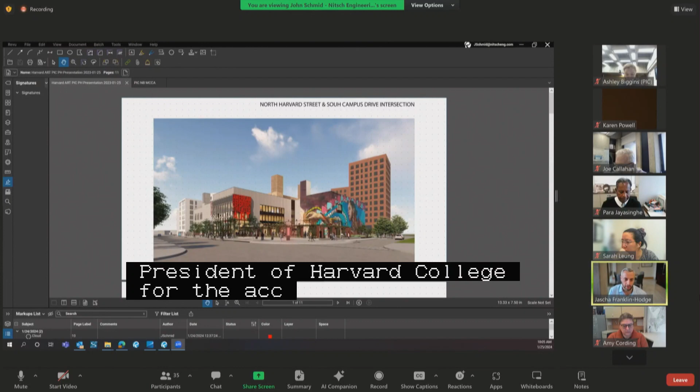Now on to our first public hearing. Public hearing number 1 on a petition by the President and Fellows of Harvard College for the acceptance of a pedestrian easement adjacent to North Harvard Street, Public Way, Brighton, located on its northwesterly side at address number 175, between Ivy Lane and South Campus Drive. This was new business on January 11th, as shown on a plan entitled City of Boston Public Works Department Engineering Division Pedestrian Easement Plan, 175 North Harvard Street, Allston, one sheet dated December 2023. Would the petitioners please introduce themselves, their affiliations, give us a brief reintroduction to this project, and talk through any changes to this action since your new business hearing.

I'll start off. Good morning. My name is Susan Malaab. I'm with Harvard University. I work for Harvard Capital Projects, and I'm managing the American Repertory Theater project, the new home for the American Repertory Theater at 175 North Harvard Street. I'll hand it off to John Schmid. Commissioners, John Schmid with Nitsch Engineering. Here's just a rendering of the proposed building. I'll skip to slide 7.

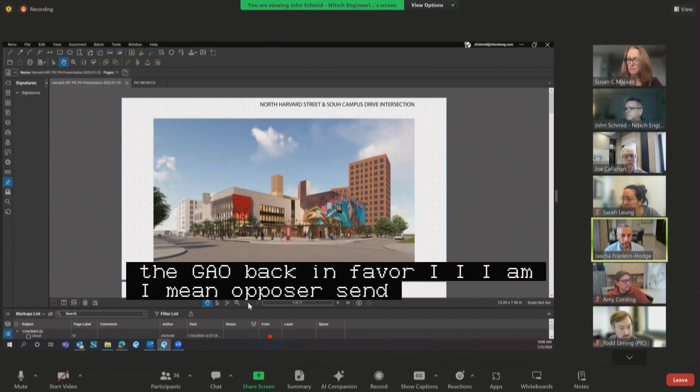On to public hearing number 2 on a petition by the President and Fellows of Harvard College for the making of specific repairs within North Harvard Street, Public Way, Brighton, located on its northwesterly side at address number 175, generally between Ivy Lane and South Campus Drive, consisting of curb realignment, sidewalk reconstruction with structural soil, as well as new and relocated pedestrian ramps, specialty pavement, street lighting infrastructure, street trees, pedestrian fencing, bike racks, street furniture, raised crosswalks, protected bicycle facilities, and a floating bus stop.

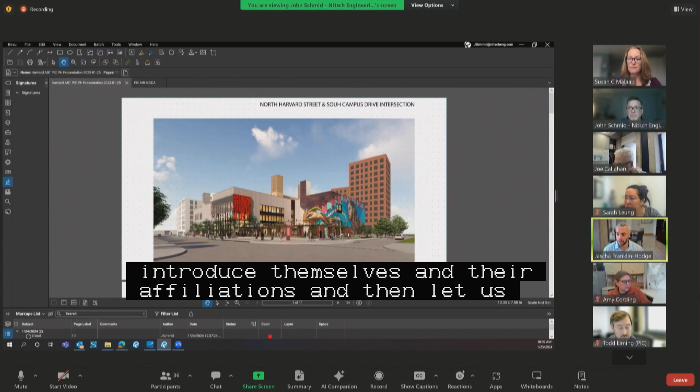This was new business on January 11th, as shown on a set of plans entitled City of Boston Public Works Department Engineering Division, Specific Repairs Plan, 175 North Harvard Street, Harvard University, American Repertory Theater, Public Way, Allston, 3 sheets dated December 2023. Would the petitioners please reintroduce themselves and their affiliations, and let us know what has changed, if anything, since your last hearing, and whether there are any updates on any of the issues that were discussed at that hearing.

Again, good morning. My name is Susan Malaab, and I'm with Harvard University, managing the project for the ART. I'll hand it off to John Schmid. Good morning, John Schmid with Nitsch Engineering. The drawings have not changed since new business, but I'll quickly go over what we're proposing here.

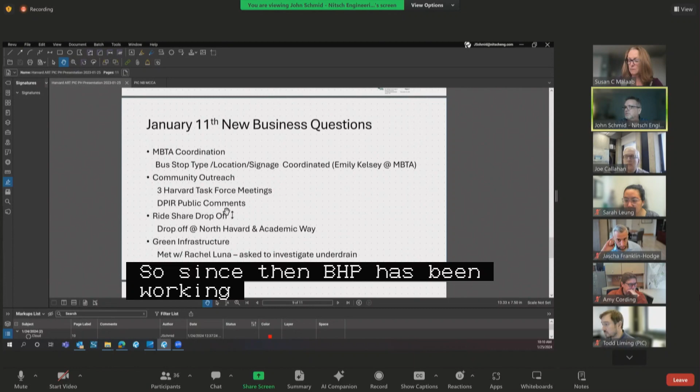Since then, VHB has been working with the MBTA. We have confirmation that the bus stop type as shown on these drawings, its location, and the signage have been coordinated between Harvard and the MBTA.

There's a question raised about community outreach regarding this project. There were 3 Harvard Task Force meetings held, as well as the BPDA process, and we have DPIR public comments that were addressed during that process.

That has been reviewed and coordinated at the Harvard Task Force, at the last Harvard Task Force meeting as well. And then there was also a question raised about green infrastructure.

My office met with Rachel Luna in the past week or so and reviewed the opportunities to provide some additional green infrastructure. She made some suggestions, and we reviewed our drawings and documentation and discussed this with Rachel, but what's being asked isn't feasible based on the existing conditions. I believe Rachel is satisfied with the project.

That's everything I have. If you have any questions. Commissioners, question?

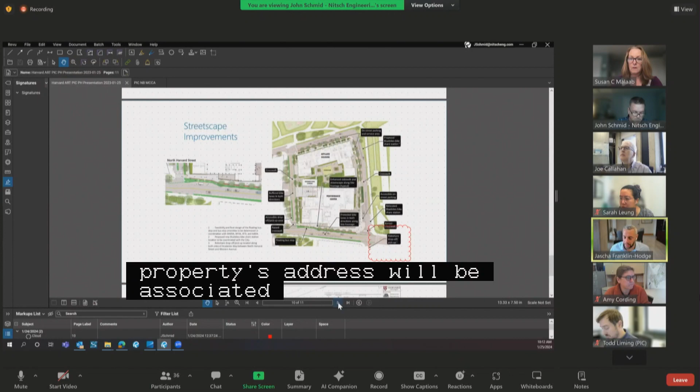I have two. One, with regards to the rideshare drop-off, has there been any conversations with rideshare companies about how the property's address will be associated with that designated drop-off area? We find that unless that is baked into their apps, oftentimes drivers don't recognize there is an area intended for drop-off and pickup, and therefore do it in the wrong place.

I'll answer that question. We are going to pursue those conversations as we go through our construction activity and prepare for the building opening. That's definitely been part of all our planning around having geofencing to prevent people from just pulling up out front and disrupting traffic flow on North Harvard Street.

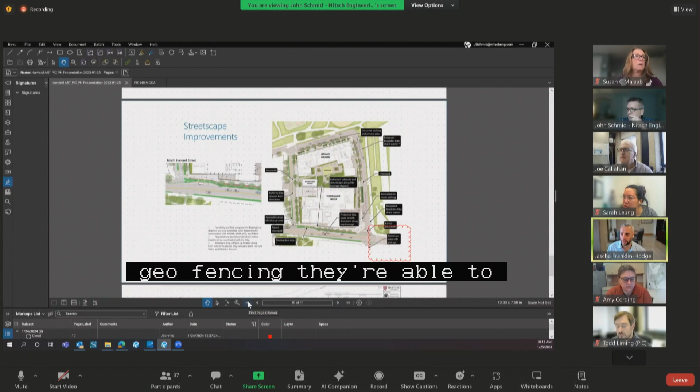Okay, thank you, appreciate that. And obviously this is somewhat dependent on their ability and willingness to cooperate with this, but I appreciate you pursuing that. My one additional ask would be that regardless of what level of geofencing they're able to offer, as the building is constructed and the site plans and signage plan are established, Harvard commits to ensuring there is ample and adequate signage throughout the building and in promotional materials — how to get to the venue — that clearly directs people coming by or leaving by rideshare to the correct locations.

That will be part of the program for the building. Correct. And in fact, we spell all of that out in our DPIR response to the city, including how we can control event management and larger crowds that might be expected depending on the shows happening and other activity in the neighborhood. Excellent, thank you, I appreciate that.

And then my other question — apologies if this was addressed at the last meeting and I'm just misremembering — but the question of winter maintenance of the bus island, who would be coordinating snow removal? Is there a clear resolution on that?

We have included those responsibilities as part of the LMA, that Harvard will manage that for the bike lane and the bus stop shelter. Excellent, perfect. Those are all my questions. Appreciate your support in resolving those issues.

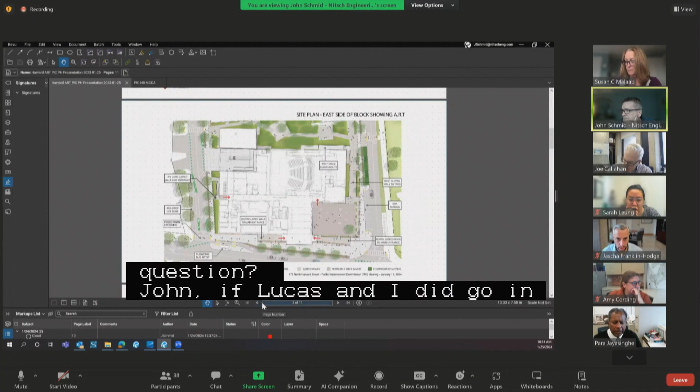Okay, so those street name signs will clearly mark them as private ways, and any type of curbside regulatory control will be a private issue, right? They are private streets, but a public way.

And that means private streets open to public travel? Correct, that's how private ways are structured. My question is, the parking regulations along those private ways, are they going to be managed by the city's transportation department or by Harvard? By Harvard.

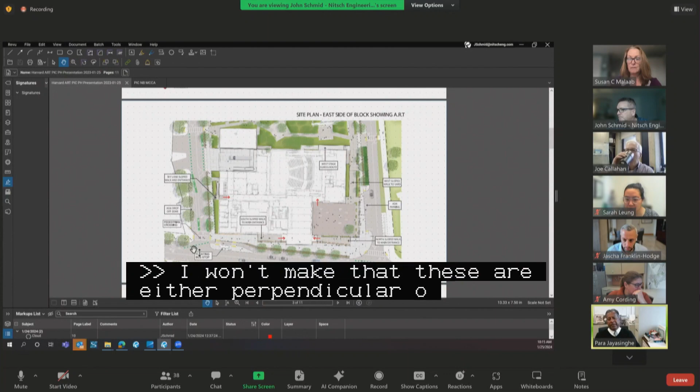Yeah, they currently are, and that will remain. And all those parking spots are parallel parking spots, right? I can't quite make out the spot, are they perpendicular or parallel? These here are perpendicular. Okay, oh, definitely private way then. Right. Sorry. Okay, thank you.

All right, PIC staff or members of the public? All set on this, I think.

Seeing no other raised hands or unmuted mics, do I hear a motion to approve public hearing number 2? I make a motion to approve a petition by the President and Fellows of Harvard College for the making of specific repairs in North Harvard Street, as read into the record by the chair. Second. All in favor? Aye. Any opposed or abstain? So moved.

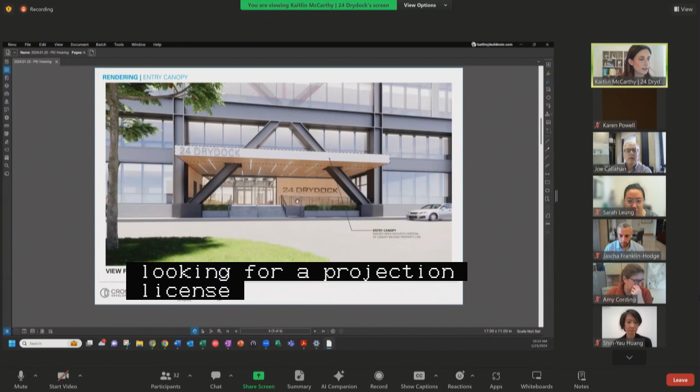24 Drydock is located within the Ray L. Flynn Marine Industrial Park, about 237,000 square feet of life science. We are looking for a projection license for a canopy that will go over Drydock Ave. Here's an overview of where the project is and a rendering of what the canopy will look like. As discussed last time, the canopy was designed within the measurements that PIC would typically require, so there will be a 15-foot minimum vertical clearance, and it will project about 4.5 feet over the sidewalk. I'll stop there—please let me know if you need more information. But as mentioned, we went through this in detail a few weeks ago, so hopefully it's still fresh in everyone's mind.

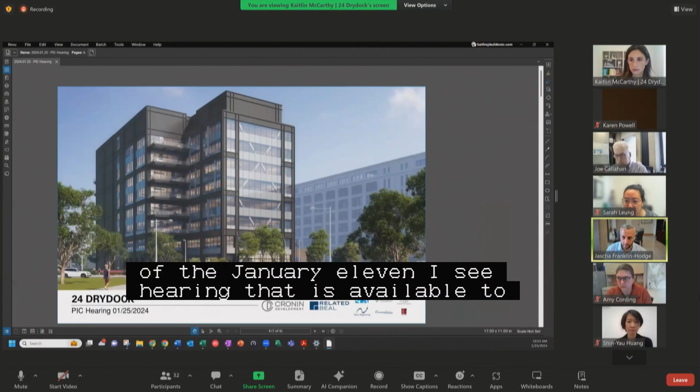I appreciate that. For the record, if anybody is looking for that more detailed presentation, you'll find it in the recording of the January 11th PIC hearing, available for anyone who wants that reference. I know there are a couple of outstanding questions related to this from the last new business. Perhaps if there's an update on any of those you want to share now, that would be fine, or we can defer that to the public hearing you'll presumably have again in 2 weeks. So I'll give the proponents a chance to share any updates now, otherwise we can just do it all in a couple of weeks.

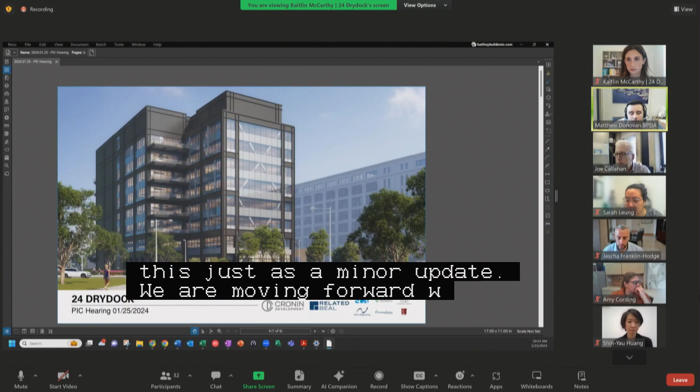Thank you, Mr. Chair. Matt Donovan from the Boston Planning and Development Agency. We are co-petitioners on this. Just as a minor update, we are moving forward with drafting language that will create an administrative fix for the accompanying and future improvements that we anticipate will need PIC review. We anticipate I'll have language for Todd well before the public hearing that'll codify what that process will look like, but it will include PIC review prior to the issuance of a full building permit for streetscape improvements yet to be transferred. Excellent, thank you. I'm glad to hear we're making some progress on that. Commissioners, any questions for the proponents?

PIC staff or members of the public?

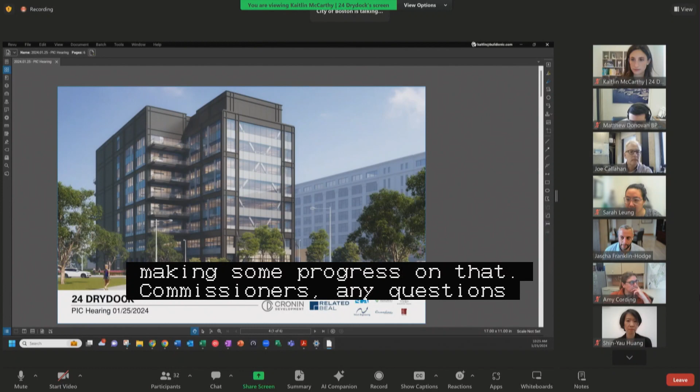Just for the record, I'll remind everybody that this street, Drydock Ave, is currently under EDIC's jurisdiction, but EDIC and the city have been in talks to transfer authority to the city. So because of that, this project is coming through the PIC process at this time.

Seeing and hearing no other comments, will you be ready for your public hearing officially in 2 weeks? Yes. All right, we will see you on February 8th, correct, Todd? Yes, correct.

On to new business number 2, 415 Summer Street, South Boston, pedestrian easement, specific repairs on a set of petitions by the Massachusetts Convention Center Authority. Would the proponents please introduce themselves, their affiliations, give us an overview of the project, and walk us through the specific actions that are being proposed today.

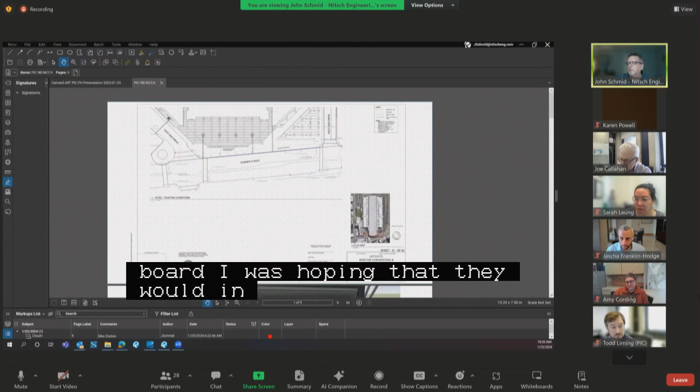Good morning, John Schmid with Nitsch Engineering. I believe folks from the MCCA are on board, I was hoping that they would jump in. I'm working with the MCCA, and Homeland Security has requested and is requiring that they install new bollards to meet new requirements. This process started several years ago, and now we're at the point where we can bring it before the commission. This is the existing condition plan of the area where there are some existing bollards now.

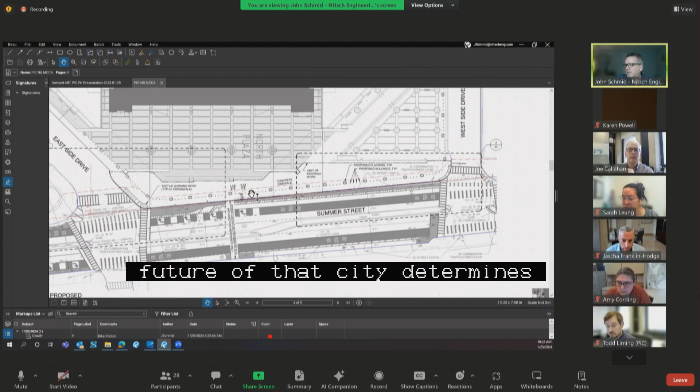Here's a plan view of it. We've been working closely with BTD over the last 9 months or so, and understand they've recently implemented their pilot program for the bike lane here. Presently the bikes come down and run along the gutter of the sidewalk. But should this change in the future and the city determines the bike should come onto the sidewalk here, this area at 8.8 feet wide is designed and appropriate for the bike lane, and this has also been talked through with multiple agencies at the city. The bike lane would then move up here, and the pedestrian path of travel would go behind the bollards here.

Because this may ultimately force the pedestrian to go behind the bollards, we are also increasing the easement that's there. Here's the proposed easement plan. This is different than the one submitted for new business because it's in the process of being developed. Essentially, the easement would run along the edge of the existing easement, providing 16 feet of clearance from the proposed bollards and planters to the edge of the easement line. There was one little pinch point here around the step, where the clearance is still 11.7 feet.

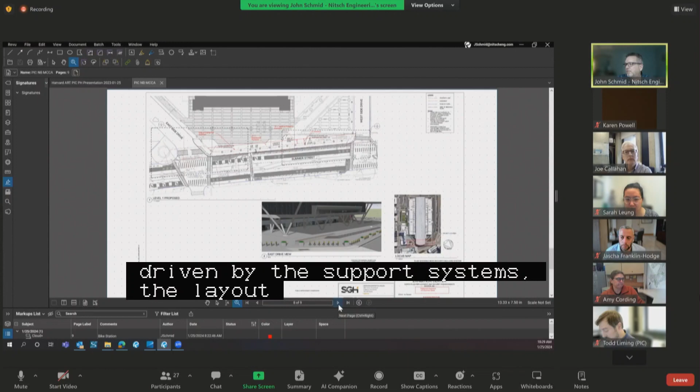Here's some details. The design itself is fairly complicated because it is on a bridge deck, so the placement and location of the bollards and planters are really being driven by the support system and steel layout of the bridge deck below. This is what was submitted to you and has been superseded regarding the pedestrian easement plan.

And then I understand there's been some question about the Blue Bike Station. Through conversations we had with BTD last summer, the convention center is committed to moving the Blue Bike Station here, which is essentially here on this drawing. There's adequate space here for the Blue Bike Station without impeding the pedestrian experience on the sidewalk. We feel this is a nice, safe location for it, because right now it's just wasted concrete space that could serve well for a bike station.

Does the commission have any questions? Commissioners?

Amy, I'm going to put you on the spot a little bit and ask you to speak to the statement by Mr. Schmid that there has been sufficient space left between the bollards and the curb line to accommodate a future bike lane on the sidewalk level, as well as loading for the cab stand that exists in front of the convention center at this location.

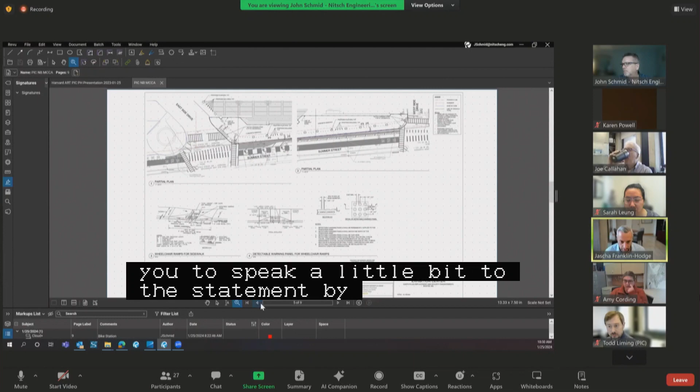Yeah, it's not enough space for a bike lane, for the signage and all of the other stuff that would be in a furnishing zone, as well as for people to get out of the cabs at the cab stand. So the bare minimum we need to maintain is 7.5 feet. But outboard of that would need to be a place for all the signs and equipment, and a place for people to safely get out of a cab without that being directly into a bike lane.

Thank you, I appreciate that. And I think, a couple of things here.

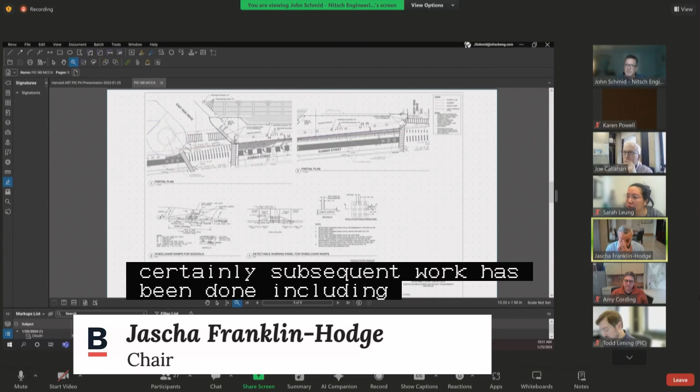The city has had a very long-standing plan to create protected bicycle infrastructure along Summer Street, going back at least as far as the Go Boston 2030 report, which is now 7 years old and specifically called this out as a priority project. Subsequent work has been done, including the current pilot configuration with a sub-minimum width bike and buffer facility, which at least tests what it would be like to have a facility there.

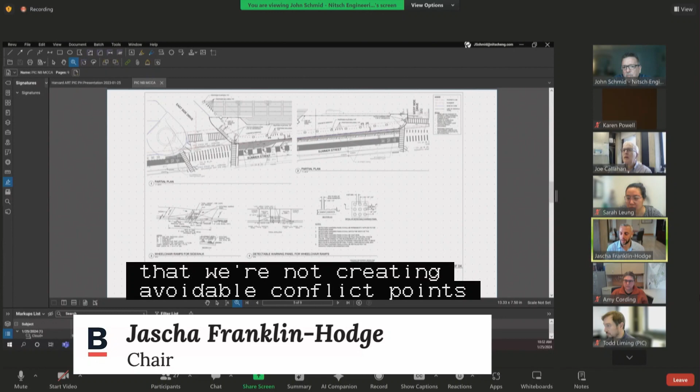The other consideration, shared by the BCEC, is that this is an area with a lot of loading activity, and it's a priority for the city to make sure that loading here is accessible, comfortable, and safe—minimizing conflicts between people getting in and out of vehicles, making it convenient for folks with mobility challenges, and not creating avoidable conflict points or narrow pinch points where bikes and someone stepping out of a cab, who may be visiting from a place without bike lanes and doesn't recognize they're entering a travel lane, could create potential conflict or safety concerns.

To amplify Amy's comment, the 8.86 feet that has been left here is concerning to us as an insufficient width to accommodate that bike facility while also ensuring comfortable, accessible loading at the curb.

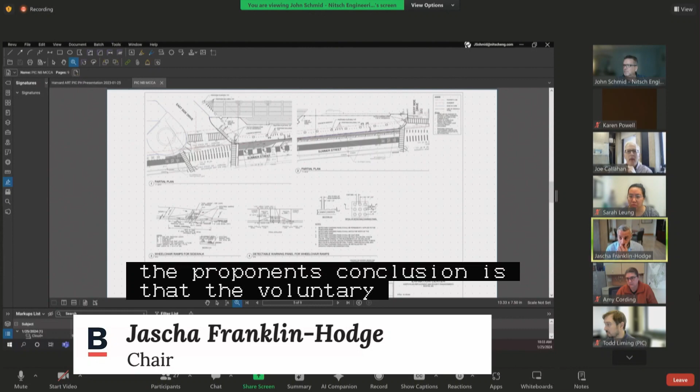My understanding is that there have been several years of back and forth conversations about this issue between BTD and the proponents, and after quite a bit of discussion and analysis, the proponents' conclusion is that the bollards cannot be relocated any further away from the curb to create a wider zone between the bollards and the curb line. John, can you confirm that's a correct statement of the proponent's position?

I'm going to defer to Matt, who was with SGH and the engineer of record on the bollard design. I'm Matt Sherman with Simpson, Gumpertz, and Heger.

The bollards have been moved back from where they originally were. What we've done is pulled them back as far as that structure allows. John, if you could flip back to page 7—the key here is that this is all elevated structure, the section down on number 5. This is all deck, all elevated deck that's supported.

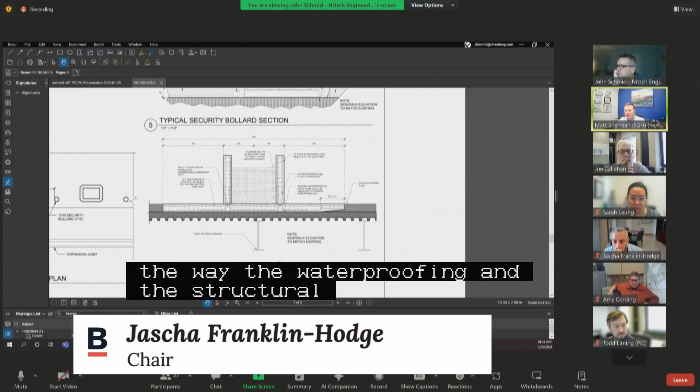The way the waterproofing and structural system works, and the way these bollards—which are crash rated and tested—have a certain dimension to their bases to meet that crash-worthiness testing and certification needed, they fit. We've pushed them back as far as we can until they start hitting the structure for the steps and other pieces of this elevated deck. It's a pretty complicated structural system up there.

We squeezed as much as we could back, and we even pulled the planters back to maximize the width there based on feedback from the initial comments on the preliminary plans. So we did pull them back—we're trying to squeeze as much room as we can out of that.

Got it. But from your perspective, structurally, with the system design needed to meet security requirements, further movement of the bollards from the curb line isn't possible given the complexities of the structure? Correct. We run into other pieces of this elevated structure behind it, and where the steps start moving up, there's a lot going on structurally. The bollard line would start getting very ragged and still have pinch points.

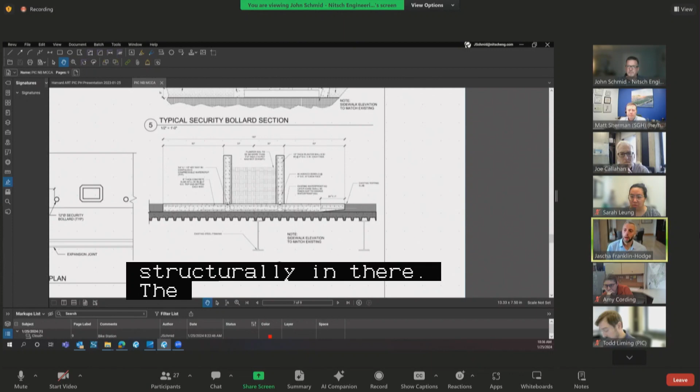Got it, that's helpful, and I appreciate the work done to maximize that space given the complexity of that underground environment.

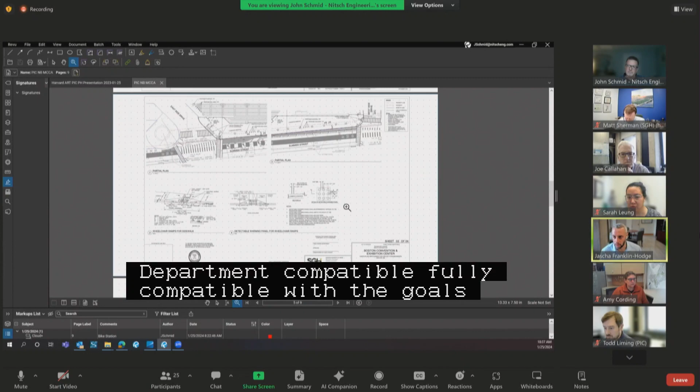And I think we're not here as a commission to challenge in any way that structural engineering or analysis. I think we appreciate that this has been well studied and well exercised. That said, given the nature of the structure and the limitations it poses on bollard placement, we find ourselves considering an action that would result in bollards being placed in a way that is not, from our perspective and the perspective of the Transportation Department, fully compatible with the goals we have for multimodal transportation along this corridor and for accessibility of the loading area.

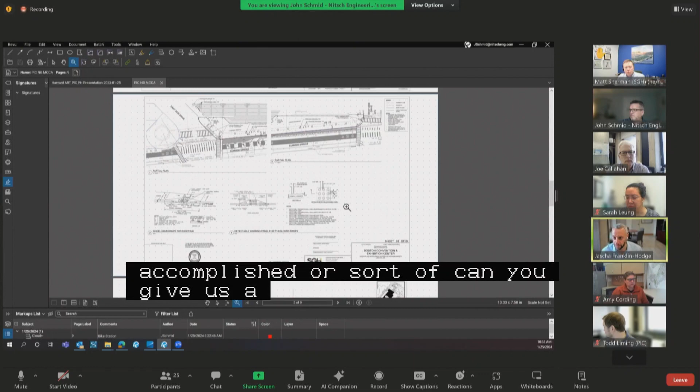I'll start with one question to help us understand the decision around bollards. I understand you're working under a Homeland Security directive around the security of the convention center, and we want to be supportive of that, but we see a mix of planters and bollards. Can you explain how the planters and bollards differ from one another? Are the planters anchored into the structure of the surface in the same way as the bollards? If not, is there a reason this project can't be accomplished with planters? Can you give us more clarity on the specific need for bollards in this vicinity?

Sure. The planters are actually recommended in the guideline documents from Homeland Security and some of the force protection documents, to help break up the appearance of the bollards, so they recommend a mix of them. You could look at similar buildings with similar levels of threat protection, like the Federal Reserve Bank or the courthouse up by North Station. Those are kind of the similar levels that are supposed to be able to stop a truck moving 30 or 40 miles an hour, depending on the zone.

The planters are all anchored in this same relatively thin slab, and that's really the big challenge here, the slab itself is very thin. So there are metal embedded pieces for the bollards that hold it down. The mix of them is they're both intended to be rated, one is rated through design, and the bollards themselves are actually crash tested, so you can't adjust them, they're an off-the-shelf item. The other piece is we weren't part of the threat assessment that was done, but the challenge is always a trade-off.

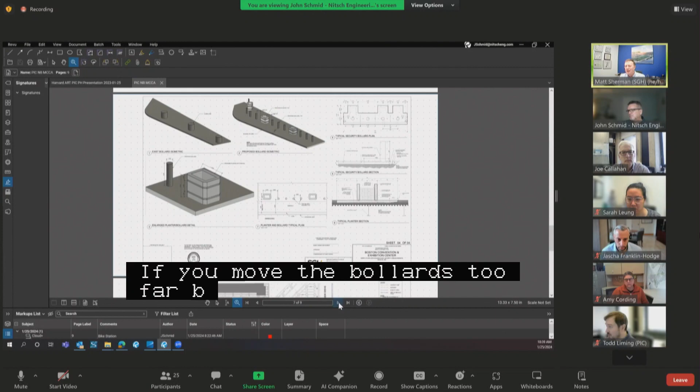If we want the people behind the bollards, because that's who the bollards are protecting, right, if you move the bollards too far back, the people then become in front of the bollards. You lose standoff distance from the facility, and you also have more people in front of the barrier. So there's a conflict of desire. We want as many people behind the bollards to protect them from an errant vehicle, but by their nature, the bollards also slow down progress through it. So it's kind of a catch, you've got to play the two sides against each other.

But the mix there, we could have done it with all bollards, but the intent was to try to increase the visibility and the appearance of the streetscape. It was at the request of the BCEC to intersperse it with the planters, to try to break up the appearance of it and make it look a little less like, say, the Fed Reserve Bank does downtown.

Oh, you're muted, sir.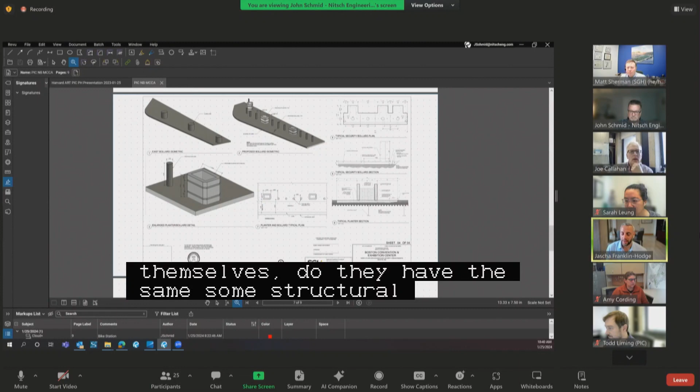Thank you for that. So just to confirm, do the planters have the same substructural anchoring requirements as the bollards? What I'm asking is, is there a version of this design that dispenses with bollards, uses only planters, and, with all appreciation for the distance issue and not wanting to push the protection too far back towards the building, would allow for a foot or two of additional space to be captured between the protection and the curb line, which is probably all that would be necessary to achieve the goals we're mutually trying to achieve?

Yeah, I'll say we haven't chased that down, but it would basically become a wall of planters. The planters could only have about 4 feet of space between them, so it would end up being like a solid wall of planters, and you'd lose a lot of ability to pass between. Right now there's a lot of open space, for every 4 foot opening we've got one bollard. If we switched it to all planters, you'd have 4 feet of planter and 4 feet of opening, so you'd go down to about 50% capacity passing between them.

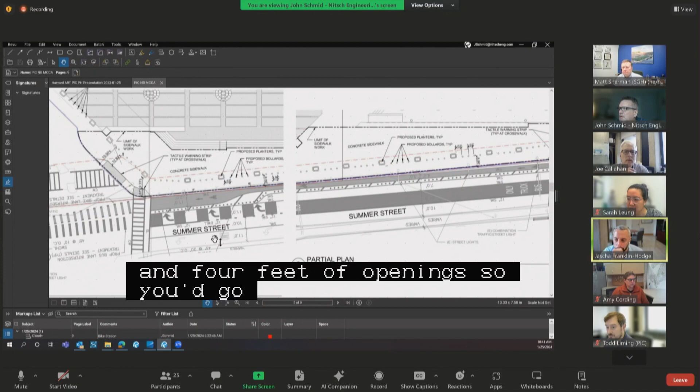Got it. Okay, yes, that makes sense and seems less than ideal from both an experience and a visual perspective, but I appreciate that. But confirming though, at a structural level, the planters are not anchored in a similar fashion to the bollards, correct? Oh, they have a similar base size.

If you go to 7 there again, John, you can see that's the section. You can see the underneath. Scroll down just a little bit on the page. You can see the security bollard, detail 4 shows kind of the depth of those, what we call the biscuits. And then planter 6 is the section through the planter itself.

And so there's a significant, if you zoom in there on 6, you see the foundation. I can't quite read the number, I'd say 87 inches extending fore and aft from the planter. So they're going to hit about the same thing, right? There's a lot going on underneath the surface to anchor those in.

Got it. This is a very weighty planter, I guess, as it needs to be. That's what they need to do their job.

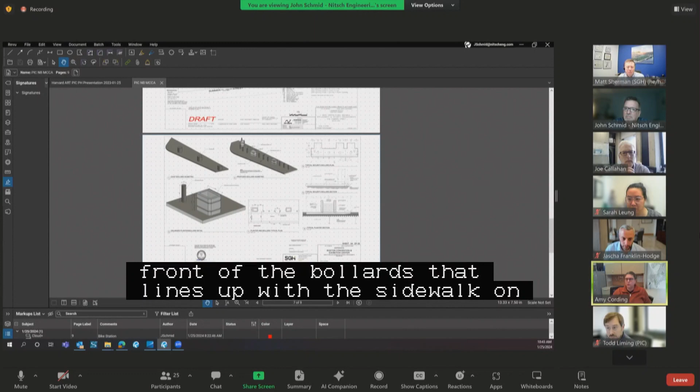Yeah, I will also note that if the purpose of these bollards is to protect pedestrians, and we leave an 8-foot cement concrete path in front of the bollards that lines up with the sidewalk on either side, that is going to be where pedestrians walk. There's no incentive to walk behind the bollards. So all pedestrians, people waiting for cabs, and bicycles will be in front of the bollards, and nobody would naturally find themselves behind it, right? So they'd be unprotected. Correct.

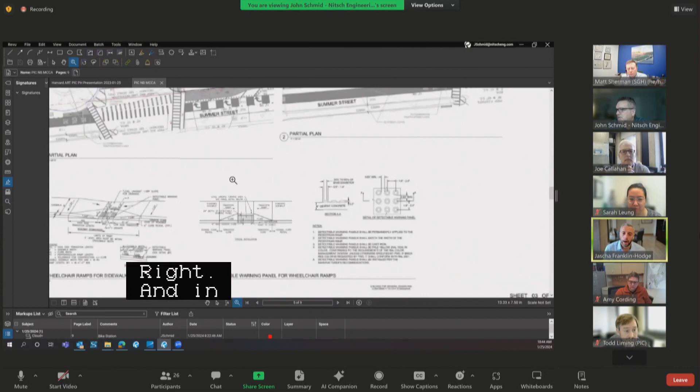Okay, so given these limitations and this challenge of balancing interests here, I guess a subsequent question: there does seem to be one other potential way to achieve the goal of a wider zone between the curb edge and the protection system being proposed, which would be to move the curb line along this stretch of Summer Street into what is now street, or currently bike lane, right? And in doing so, that would widen this 8.83 feet sidewalk zone. Is that an idea that has been explored, and are there technical barriers you see to that, or is that something that has not yet been fully considered?

Yeah, it's an interesting question. There's actually along the curb line right now, if you go out and look at it, there's a joint. Those are two separate structures. There's one structure that's the BCEC building that has the sidewalk on it, and the other structure is the roadway structure, which is where the maintenance of highway is. So there's actually a construction joint that runs along kind of where that red line is, right along the face of the curb line. There's a narrow joint you can see in the pavement that runs there, differentiating the BCEC structure from the roadway.

So that joint would have to get, and they're physically separate structures, there'd be a little bit of pieces, and it would have to be building out on the, I'm not sure who the owner of the actual roadway is, but I think it's outside of the limits of BCEC's property.

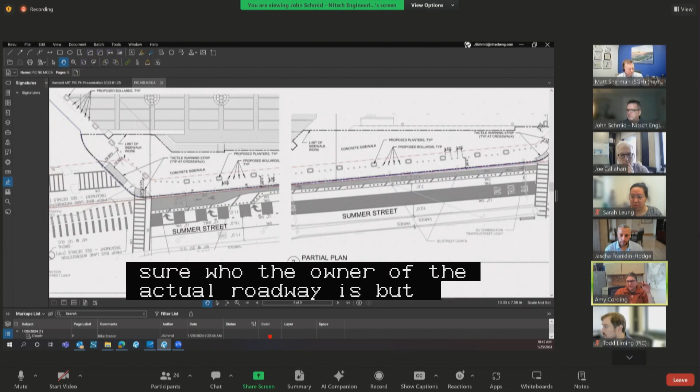Could the joint be at sidewalk level instead of roadway level? It could be, but I don't know that you'd want to be running a bike lane along it. No, it would be in the furnishing zone, right? Like if we leave the existing curb where it is, and then create another curb, probably not granite because we don't want it to go into anything, but like a cement concrete or poured curb outboard of that, then this joint and all of the signs and other things that would typically find their way into a furnishing zone could be in this space from the existing curb to this new curb, and it not being a place you would naturally walk. It would act as our furnishing zone, but it would leave the joint kind of the way it is, just bring the roadway up on the other side.

Yeah, I'll say we have not been asked to chase through that option. I haven't looked closely at it. Okay, so that might be one thing to explore.

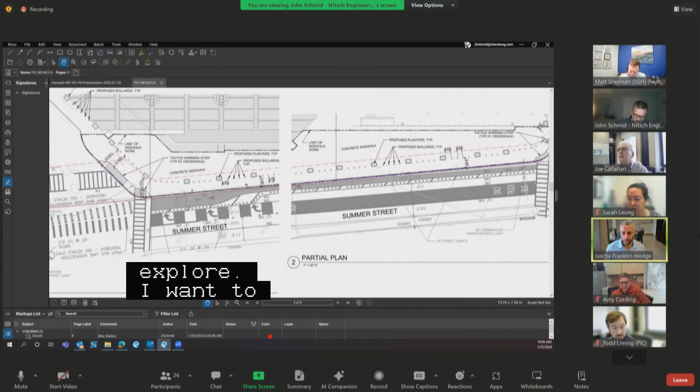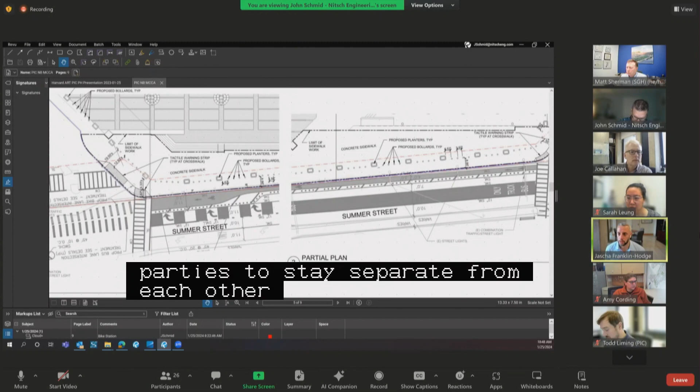I want to put an idea in your heads, because I think we're going to ask you to explore this in more detail between now and your public hearing. There are some modular systems other cities have used, not in this precise situation, but to create floating bus stops and loading areas where constructed improvements are challenging due to some obstacle, whether it be drainage or a bridge joint or structural joint. These are modular materials using modular platforms that essentially create a sidewalk extension off of a curb line, highly durable, winter-rated modular segments that still allow for access underneath for drainage and maintenance. In some cases they've been used for sizable long extensions of a curb off its constructed location, and are frequently used where there's a need to ensure bikes and pedestrian loading can happen safely with sufficient space for all parties to stay separate. So that's a non-constructed potential approach that could, if viable here, allow for that curb line extension.

My perspective on this is that I am very reluctant to approve a design that feels like a permanent change to the sidewalk here that is incompatible with the city's stated objectives around bike access and pedestrian and loading accessibility, without a very clear plan for how we would achieve those goals through other means. So I'd like to see the proponents work to establish that clear plan now and bake it into your submission for PIC review and approval, so we know what we're approving now is addressing both the security goals of the BCEC and the transportation and accessibility goals of the city, and that we're not trading one off against the other by approving permanent changes to the right of way.

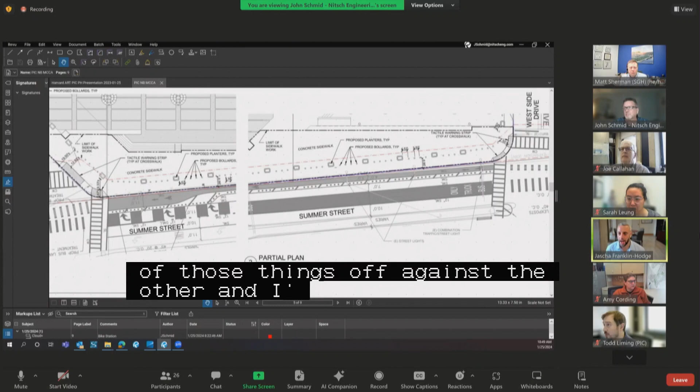So we'd be happy to connect offline to share what resources we've seen from other cities doing modular systems. And I think it's worth exploring the question folks have raised around the joint, and whether that can be raised up to sidewalk level if a constructed extension of the curb is viable.

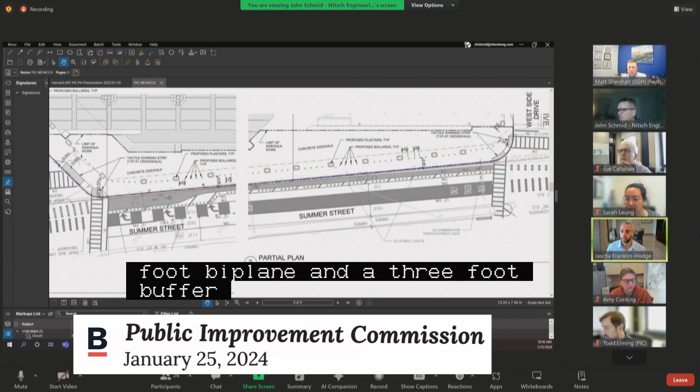I think we've shown in the current pilot configuration that there is space in the roadway that could be used to extend the curb, provided the bike lane can be put onto the sidewalk. It looks like 7 feet in the current configuration, a 4-foot bike lane and a 3-foot buffer, could conceivably become, or some portion of it could become, a very comfortable accessible curbside loading area for people getting out of a cab, while also allowing bikes to safely travel between the new curb edge and the bollards. That, from our perspective, would be an ideal outcome for a project like this.

So my ask would be that the proponents work with us to explore some of these ideas between now and the public hearing, and that we hopefully can come up with a comprehensive solution that addresses all of these issues together.

Understood. I do have one question, getting back to what you asked about the planters. Right now the planters and the bollards provide a straight line that's 8.8 feet off the curb line. If we were to remove the planters entirely, we could move the bollards back to widen that 8.8 feet to possibly 10 feet. Would that satisfy your concerns? We'd lose the planters and some of the aesthetics, but I think that would meet your objective of having a wider bike lane. Is that fair to say?

Yeah, Amy, what do you think about that? Yeah, I think as long as we have enough dimension for the bike lane to operate and be maintained separate from where you would unload and put signage, that's all we care about. So as long as it works dimensionally, then that seems potentially viable.

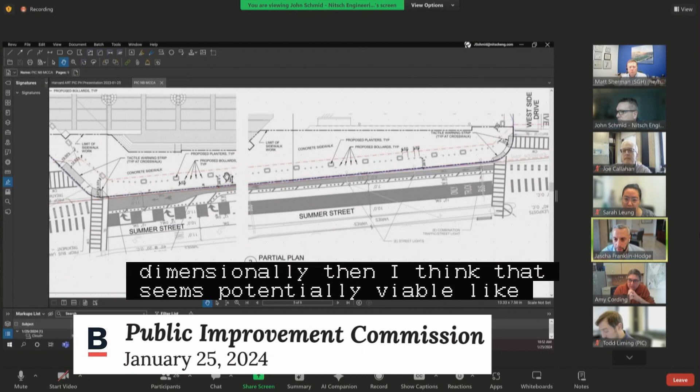Thank you. John, in this model it looks like the curb edge of the planters is sort of flush with the bollard line. Are you saying the bollards could actually be anchored to what is the building edge of the planter, that line, instead of the curb edge of the planter? Am I understanding that proposal correctly?

I'm going to defer to Matt. I'd have to double check and see where the pinch points are. I'm pretty sure we pushed them back about as far as we could go, but I'll go back and look.

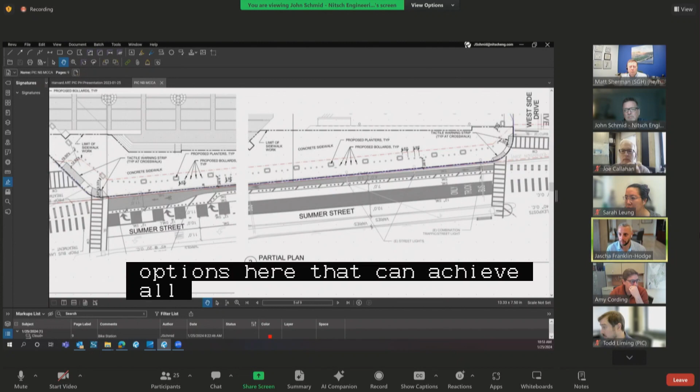I think we'd be open to considering that. We're into inches here, so it's probably best done offline of this hearing to walk through the very specific proposals and make sure there would be sufficient widths. So my ask is that we have a subsequent conversation, or a series of conversations, about the options that can achieve both the BCEC security goals and the city's multimodal and accessibility goals. Hopefully one of these options may provide a comprehensive solution that could become the basis for what we move forward with.

So, the question now is, do we think we'll be ready for a public hearing on February 8th? My hope is that we are, and if we're not, then we could ask for an extension to the end of February.

I think that's fine if you guys are okay with trying to work expeditiously on this. I don't want to set up the extra labor of a continuance for everyone if we don't think 2 weeks is a realistic timeline. But given the potential resolutions put forth, if you think 2 weeks might be sufficient, then I don't have a problem with continuing this or putting you on a public hearing in 2 weeks.

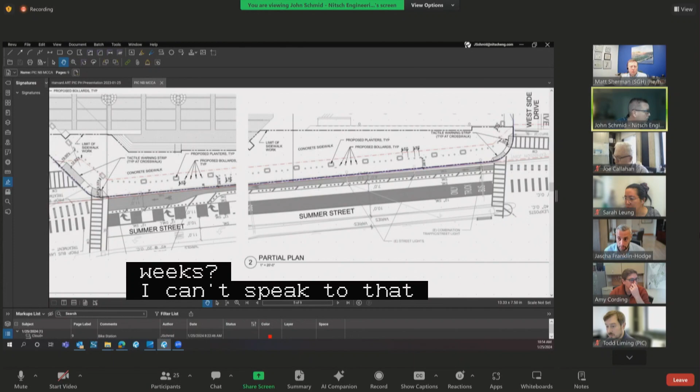I can't speak to that because that would be Matthew's call, whether he thinks it's something they could explore in the next 2 weeks, or do you think we're better off waiting for the public hearing on February 29th?

I think we could look at the clearances and the like, but there's also a substantial portion that BCEC, I don't want to speak for them, but they may want to look at the loading, those kind of pieces, and the streetscape and uses of the space. I could get the geometry done, but we won't have the analysis.

We could see if there's any busts, I guess, by that point in time. Okay, given that BCEC sounds like it's still not present on this call, and that they're a key party in this, I am inclined to push this to put you on the public hearing schedule for 4 weeks from now, because we don't have them here to confirm they'll work expeditiously from an operational perspective, as you are confirming you will from an engineering perspective. So rather than waste time with a continuance, I think we should push this out a couple extra weeks to give everyone time to work through this.

Mr. Chair, John Donahue from the Convention Authority. Oh, you are here. Hi. Yes, sir.

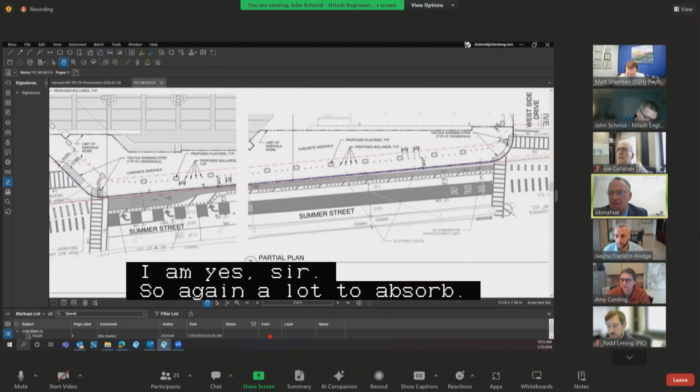Again, a lot to absorb. I would probably recommend that we ask for that extension, just to give us time for the due diligence that may occur, and to ask questions such as if we do jump the property line, per se, and have to take structure out into the street.

Has that ever become a city street, or is it still MassDOT? And does that complicate the design, if it's a city street over MassDOT structure? But we will handle that piece of it if we have a design.

So we would welcome any information, Amy, that you want to share, and we'll get working on that. Just from a 30,000 foot elevation, there would be a concern from the authority about losing that aesthetic quality. We were trying not to become fortress-looking with just a series of bollards. That's why we went with illuminated bollards, and the plantings were a huge concern for us, to try and have some sort of aesthetic quality or beautification to the front and not be so sterile.

If not a bollard, if there's an alternative to a planter, we'd be open for that too. But natural green, those kinds of things were highly considered, I must say.

Yeah, I appreciate that, and it makes sense that the goal is not to look like you're welcoming people to a federal building, so that's very reasonable. I hope we can come up with a resolution here that enhances, even above and beyond what's currently proposed, the experience of an arriving visitor. We want the convention center to be successful. It is an important asset in the city.

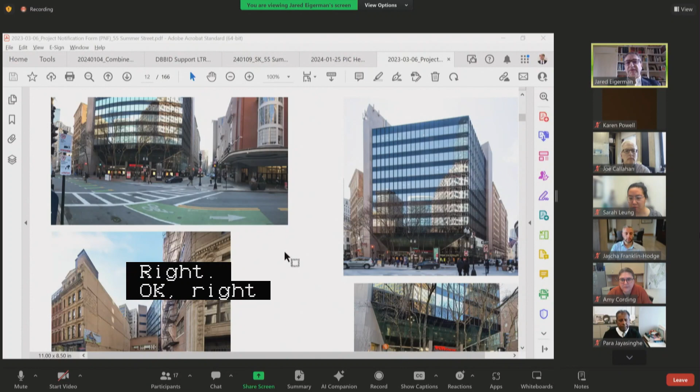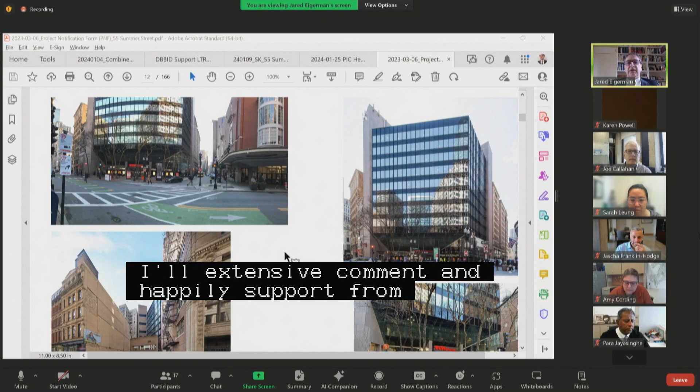So this is a well-known corner in downtown Crossing. I hope you're able to see it. It was redeveloped in the mid-'70s as the headquarters for Charlestown Savings Bank, and it has this unfortunate international style that was fashionable then. There's a pedestrian plaza right on the corner at Chauncey and Summer that's been open ever since the building has been open. The project went through large project review last spring, with extensive comment and happily support from the downtown BID to spruce up that private plaza, but the public ways also need some work, and that's what Sean's going to show you. It's a challenge, as you know, in downtown Crossing to keep these buildings alive with people. The upper stories will be converted to laboratory space, and there'll be considerable investment. With that, I'll turn it over to Sean, and I'll stop sharing my screen and have him take over. Thank you.

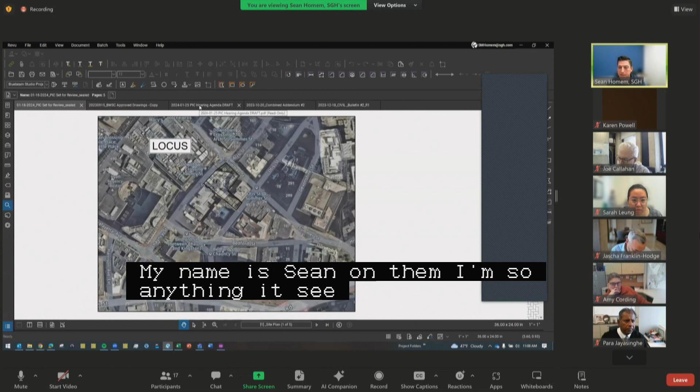Thank you. My name is Sean Homem. I'm a civil engineer with Simpson, Gumpertz, and Heger, and today I'm pleased to share with you the site improvements for the specific repair at 55 Summer Street.

Here on the screen, I've shown the locus plan to give you a little perspective of where we are. Jared had shared with you the street views of this particular property. Located at the corner of Chauncey and Summer Street, 55 Summer Street has front access from the Summer Street corner, but it also has a rear access yard in the back on Kingston Street, noted here as 11 Kingston Street. At this particular location, there's access to a loading dock and some other rear yard components.

This project has certainly evolved since last spring based on significant collaboration and evolution of comments from various stakeholders in the Boston approval parties, as well as some PIC input along the way.

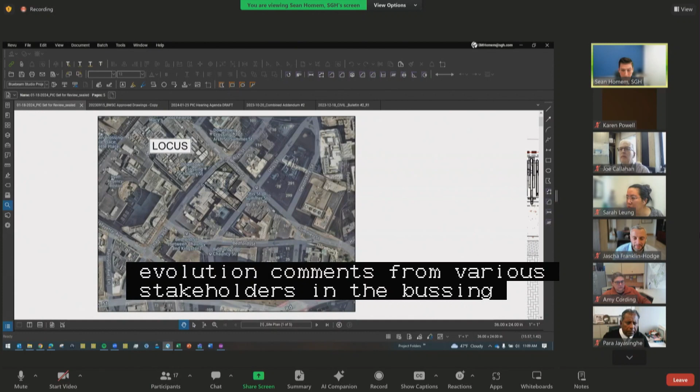This first plan in your docket is the rear yard. These rear yard improvements were primarily issued, and this is where the project started with only rear yard components. This was basically improved to support the utilities in the area, and you can see a significant amount of utilities coming from the rear of the building out into Kingston Street. In addition, in this rear yard, we have the stormwater tank that was installed to satisfy the BWSC recharge requirements.

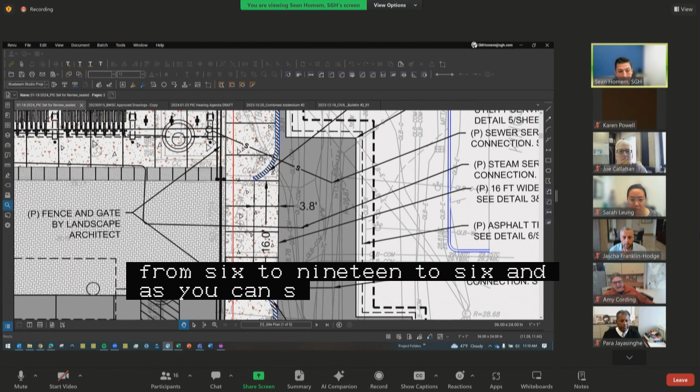At the public way, we were generally going back to meet existing conditions. However, based on some urban design commentary, they requested that we reduce the width of the access over the curb cut in this area, so we've actually reduced it from 19 feet to 16 feet. As you can see here, the existing curb cut has actually been reduced down to 16 feet. That is the general scope of work included with the rear yard component of this project.

Moving on to plan number 2, this includes a significant amount of public way improvements, and again, this was added as a result of project direction and stakeholder commentary.

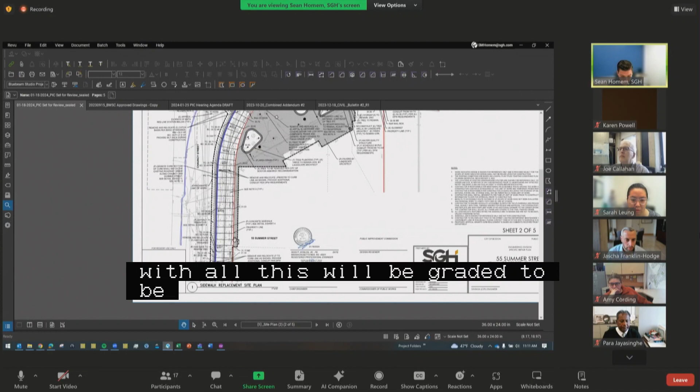Starting from the bottom left-hand corner of this page, you can see that the sidewalk width has been increased per BTD commentary. We've realigned this curb as a result of their commentary to reduce the driving width but increase the pedestrian access width. All this will be graded to be ADA compliant. In addition to this curb layout, we're hoping and planning to remove and reuse the existing curbs in this area, only providing new curbs where existing ones cannot be used.

Moving up towards the intersection, you can see that in addition to the curb relocation, we have a catch basin relocation. There was an existing catch basin on that curb line that we had to move out to accommodate the drainage in this area. All this done, of course, in accordance with BWSC requirements and approval.

Moving towards the intersection, you can see that we've gone for the reconstruction of 3 pedestrian ramps. On the building side, we've reconstructed those to be in accordance with ADA requirements. However, across the street at Uno Due Go, that particular ramp had some geometric constraints that required us to apply for an MAAB variance, which we were granted. The geometry in that specific location didn't allow us to meet the explicit requirements of the ADA, so we went through the variance process, got approval, and have included that filing number for your reference on this plan.

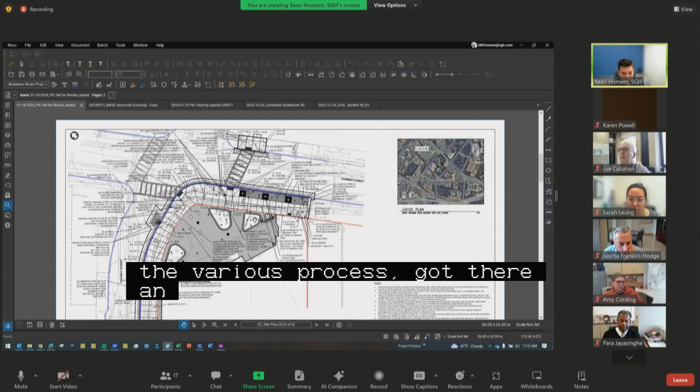In the street, we plan to repaint the affected crosswalks. In addition to supporting these pedestrian ramps, we're calling for the relocation of pedestrian signals, light signals, and site lighting to facilitate that.

Moving plan east, you can see that we have a series of trees that are in the public way. We're keeping those in place, maintaining and protecting those during construction. In addition to that, we're installing new grates, and around these trees we're proposing the installation of permeable pavers. Adjacent to these trees, you can also see that we've called for the installation of bike racks to facilitate bike parking.

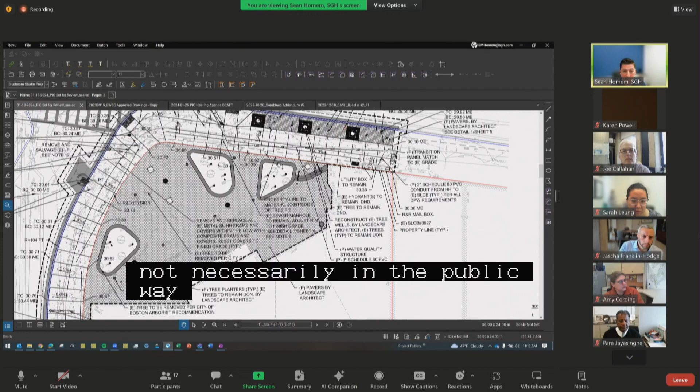Closer to the building, not necessarily in the public way, we have a new paver layout with tree wells, certainly improving the aesthetic appeal of this particular plaza, which is currently just a brick paver plaza, and it will definitely liven up the pedestrian access in this area.

We have a series of plans that follow and support this work. On Plan 3, we have the details of the pedestrian ramps and curb cuts, including the Uno Due Go ramp that required that variance, and we're providing explicit details of what that's going to look like and what was approved by the MAAB.

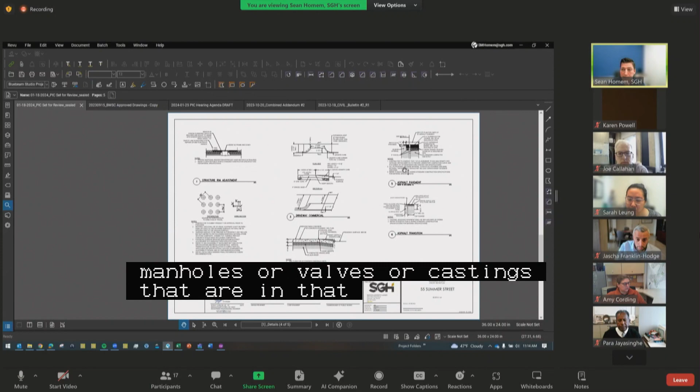Following, we have some more details that can be referenced for rim adjustments in the public right of way. Any manholes, gate valves, or castings in the public sidewalk will be readjusted to meet the new proposed elevations. In addition, since we're extending the sidewalk into the street, we're running into some castings in the street that we'll have to readjust to be within the sidewalk.

Again, more details for tactile warning strips, pretty standard for the pedestrian ramps, as well as driveway details for the Kingston Street side.

Again, just providing more guidance on what the sidewalk and driveway restoration will look like, as well as the asphalt pavement that we're trying to meet the existing elevations at the project extents.

And here are some more details regarding the permeable pavers that will surround the tree wells, the bike racks adjacent to the tree wells, and then our general detail for the removal and replacement of the vertical granite curb.

So with that, that's the general scope of the project. Happy to answer any questions. And again, thank you for your time and the opportunity to present our project to you.

Thank you very much, appreciate that overview. Thankfully, this is the PIC, not the Civic Design Commission. Otherwise we might be spending an hour debating whether international style is indeed unfortunate or historic and important. But we can keep our conversation to the surface here.

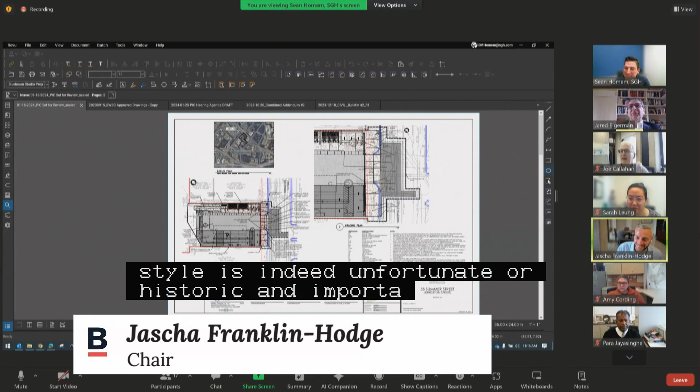Commissioners, questions, comments? Hi Sean, thank you so much for your presentation. I did have a few comments that I wasn't able to send in an email in time for this hearing, so I thought I'd bring them here to see if we can figure out things before the public hearing. Great.

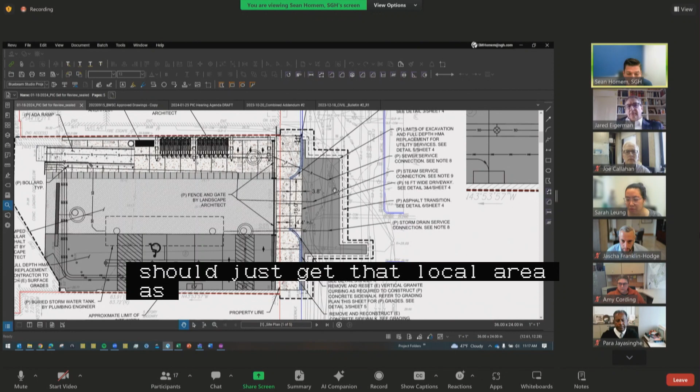For the sidewalk, we were wondering if any adjustments could be made to the type of curbstones used to really maximize the path of travel for the driveway on Kingston. It's showing 4.4 feet clear, and if there's any way to maximize that and gain a few more inches, that would be appreciated—any investigation into the curbstone used to get that level area as close to 5 feet as possible. Yeah, we can certainly look into the curbstone used there and coordinate with the details of the commercial-style driveway ramp we have. We'll certainly look at that. Thank you for the comment.

Great, thank you. And then on the Summer Street side, I just had a few questions about the ramp. First, the alignment of the ramp that had gotten the variance at that crosswalk—wondering if any adjustments could be made to either of the ramps to get a more straightforward crossing there.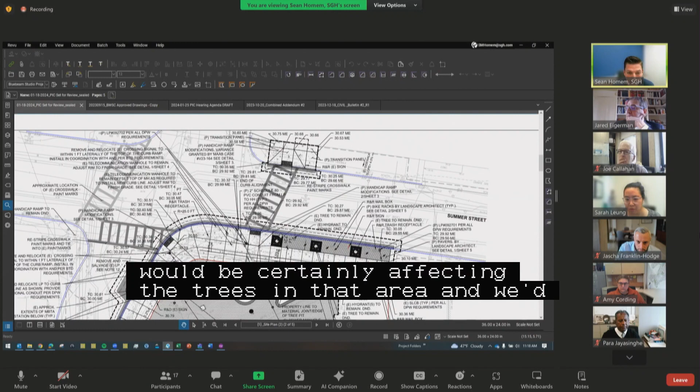So as far as making them a little more perpendicular to one another, is that correct? Yeah, we certainly looked at various locations for where we could put this. We're kind of constrained by the trees to the right of 55 Summer—if we move it closer, it would affect the trees in that area, and we try to maintain trees in that specific zone. Across the street, we wanted to maintain the current path as best we could while providing a more accessible ramp at that location than currently exists.

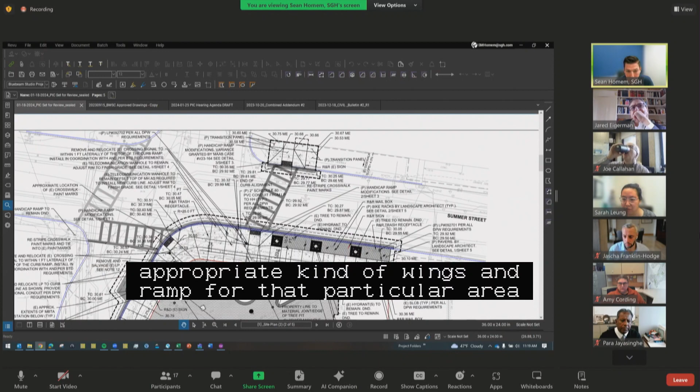That is not currently a compliant ramp. It's hard to work with, particularly because the entrance to Uno Due Go is directly behind this location—it's a very tight corner. Yes, very tight—there's not as much infrastructure there, but it's certainly tight as far as the geometric constraints. Going more perpendicular may not give us the appropriate wings and ramp for that particular area. We explored it and tried to make it as perpendicular as possible, but we either had to move one up, impeding on the corner, or move the other down, impeding on the trees at that location.

Can you bump that corner out? Because it seems like, with the contraflow bike lane there, there's just dead space from the parking buffer—so if that whole corner came out to essentially the bike lane, you'd have enough room to put your ramp right there.

Yeah, we certainly looked at bumping that out, and we proceeded with the variance based on some discussions there. If we were bumping it out there, it'd be more chasing the entire intersection to kind of get that redone. During some conversations on this PIC, our progression through this was discussed as an option with some of the members, so we went down this path of variance.

But it seems like you solve all of your problems by bumping out the curb. We get compliant ramps, a perpendicular crossing, and better circulation and sidewalk dimension in front of the business on that corner.

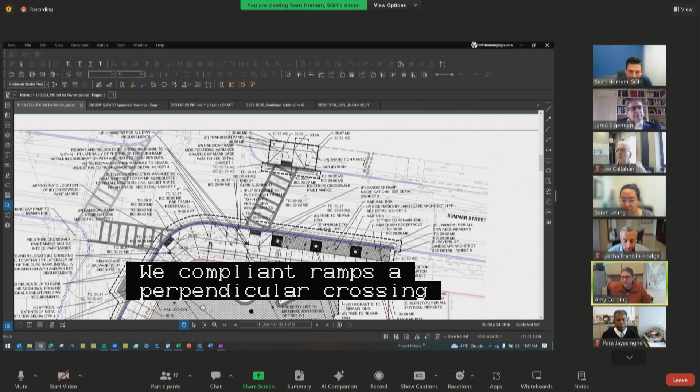Okay, yeah, I'll take those comments back and consult with the owner, and I'll get some feedback from both Amy and Sarah along the way. Again, that was kind of our thought process of this particular intersection and the direction we were provided.

I also heard moving signal equipment. Where are you with that? So, as you can see with this particular location, remove and relocate existing crossing signal to within 1 foot laterally at the top of the curb ramp, install in coordination with and per BTD requirements. We show the general location of where the signal currently was, and where we propose it being.

And have you had this conversation with BTD Signals? We generally got direction from them on where they needed to be, and there was some final coordination to be done with them regarding these locations. They certainly provided some direction on where they wanted to see them.

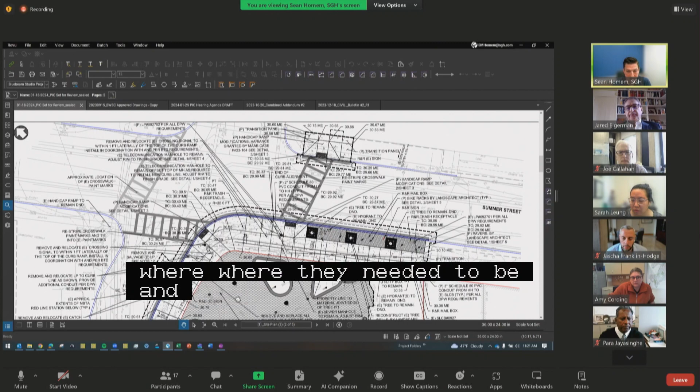Is that ramp in front of Macy's compliant? Currently that ramp is an apex ramp that we've found was constructed within the last 15 years. If you give me a second, I have the street view pulled up. That specific ramp has a significant amount of underground and above ground infrastructure around it, and seeing as though it was recently reconstructed, we called to maintain that specific ramp.

Has compliance been confirmed? I'd have to look at the existing grades, but I believe it was compliant. I can check the existing grades at that location to confirm that. Yeah, if we can just double check the compliance of that ramp - it being constructed within the last few years may not guarantee compliance - so just wanted to have that checked out and make sure that's reflected on the plans. And if not, it would need to be reconstructed.

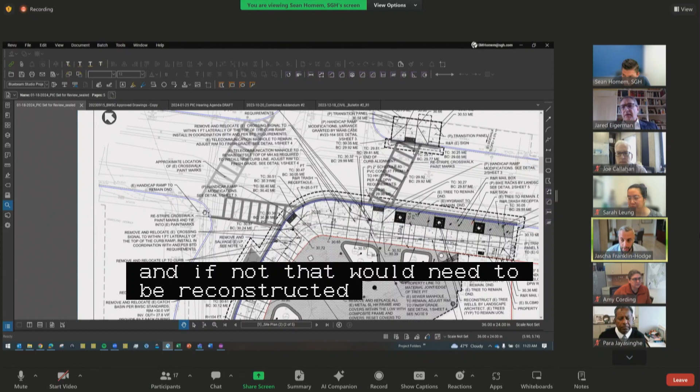I would just note too that the tactile on that ramp is gray and not in keeping with current city standards. So even if the geometry is compliant, we would want to see the tactile replaced to maximize accessibility for the visually impaired.

Thank you. That reminded me of my last comment in the details pages, just making sure that the detail calls out for the cast iron yellow detectable warnings. That language, I think, can be found in the Public Works detail website that I can send as well. Thank you.

Sean, I have a couple of points. Can you go back to your specific repair plan? Which one - the one with the bird's eye view of Summer Street, or the one we were just discussing? Not that one, the site one. Yep, previous one, that one. Can you show more of the intersection? Can you position it so you see more of the intersection? Okay, move, slow down. Okay.

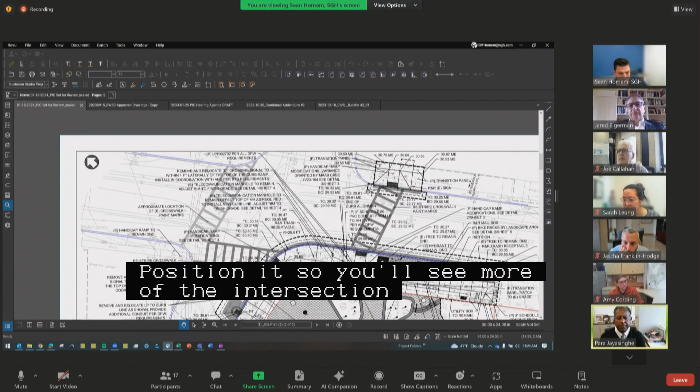So going east to west, left to right, you've got Summer Street, correct? Right. On the south side you've got Chauncy, yes? Yep. And on the northern side you've got Arch Street. Is it Arch or Kingston? Arch Street. Okay, Arch, yeah. So, Todd, make sure that the petition reflects Arch Street, not Kingston, unless I'm missing something over here. Second point, please do put the street names on there, since there might be confusion.

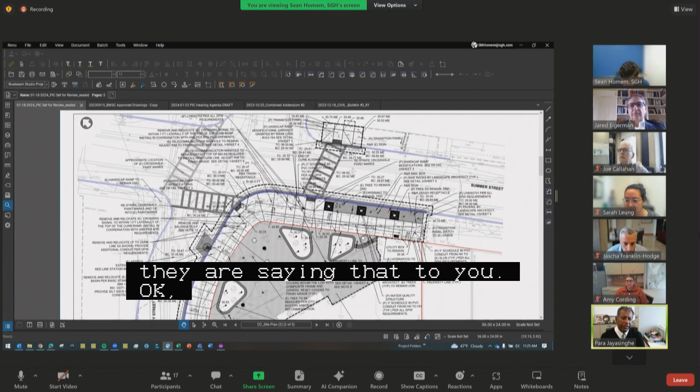Third thing - the other commission members have been extremely polite in what they are trying to say, but the crosswalk on the right-hand side crossing Summer - think about both a sighted person or a visually challenged person - no one's going to use it. I don't use it because I always wonder why it's in the wrong place. So do what needs to happen to move that crosswalk more in line with the path of travel. Commission members have been very gracious in how they're saying that to you. Okay, so that's what needs to happen. You are introducing a project over here that's probably going to generate a few pedestrians, right?

I just want to bolster what Para is saying by noting that I clicked through about 10 years of Google Street View history during this call, and you'll find in almost every single one of those photos people crossing in the natural line of travel outside the crosswalk. It's in the wrong place, and we should not put it back in the wrong place. Thank you, Chief.

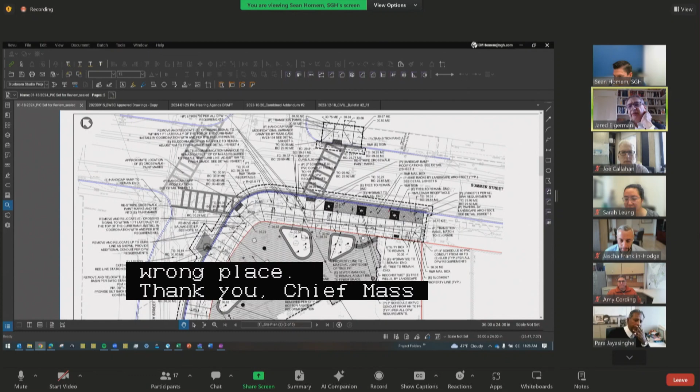May I ask a clarification? So that would require eliminating that one tree. So all things being equal, is that where we're headed? I think the solution Amy proposed of extending the current corner there would allow that crosswalk to potentially land at roughly the same place on your property side, but connect at a more logical place on the opposite side of Summer Street, without impacting the tree. The goal is not moving it further from downtown crossing on Summer Street, but to not have that skewed angle that takes it off the actual corner.

Yeah, on your side, you'd move it all the way to the ped button, right? You don't want to move other stuff and equipment out there, but it can come all the way to the ped button, desirable for those who want to press it and use the ramp, then cut to the corner on the other side. So you've made this corner bigger, a little bit, but this ramp can come up slightly. It's the other side that I think could come to the corner if you bump it out. We'll do our best, we'll look at that.

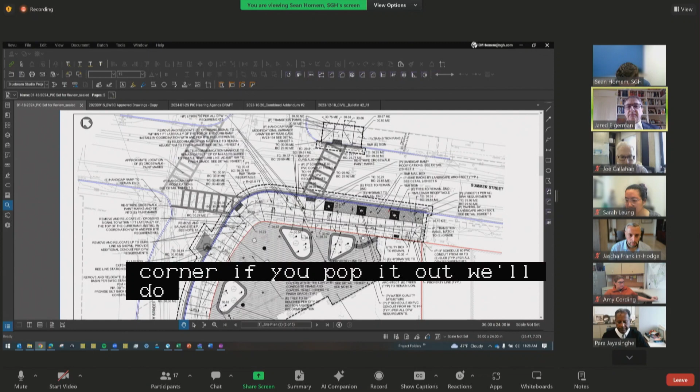One minor request: your plan has a couple of crosswalks being repainted, at least one of which has significant other abutting marks in the form of a double yellow center and a contraflow bike lane. We'd request that your plans note that any crosswalk striping or relocation impacting other pavement markings will be redone appropriately, so they're in good condition relative to the new, updated, or refreshed markings you'll be doing. Understood.

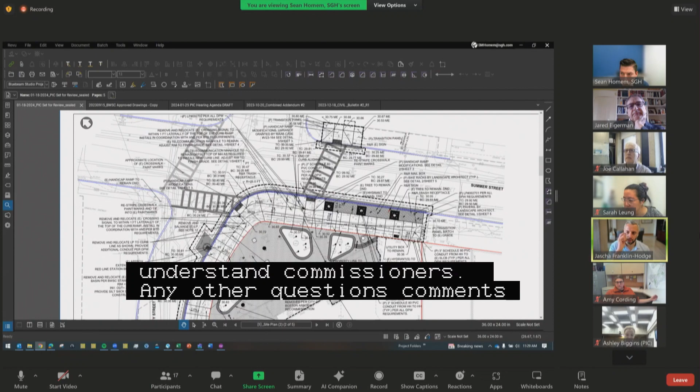Two very quick things from me. One, I believe you're showing at least one JCDecaux signage structure being impacted. Just confirm you've worked with property management and JCDecaux on that, to make sure there are no concerns with that relocation. Good morning, Todd, this is Gannon, Ventures with Phase 2 Real Estate. Yes, I'm talking with both folks at the BPDA and JCDecaux on this.

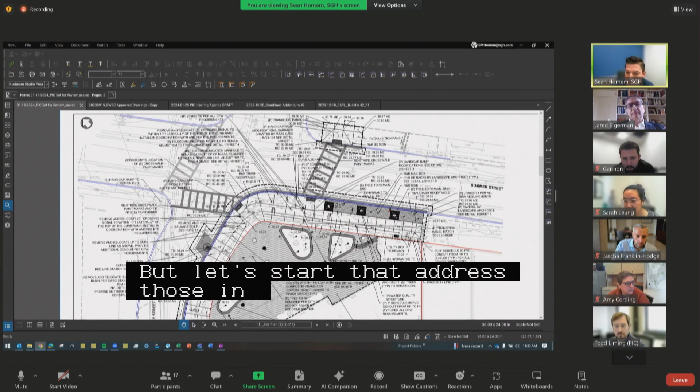Great. Second, I know you recently received a handful of comments from the Office of Green Infrastructure. We'll want to see that you consider all of those comments. Some of them might actually be a little in conflict with some of our accessibility comments received today, so I'll help you navigate the push and pull needed between those sets of comments. But we'll expect you to address those in the next two weeks. Yep, and one item in particular was the use of permeable pavers, which may not have been explicitly shown on this plan, but next to the big tree planting areas, so we do have some permeable pavers consistent with the green initiatives. Great, I'll continue to work with you on that.

All right, will you be ready for your public hearing in two weeks on February 8th? We certainly will attempt to be so, we're going to work diligently to do that. All right, excellent, we'll plan to see you back then, and please work with all the folks on this call on the issues we've discussed. Thank you very much for the time and review of this with us. Appreciate that, thank you.